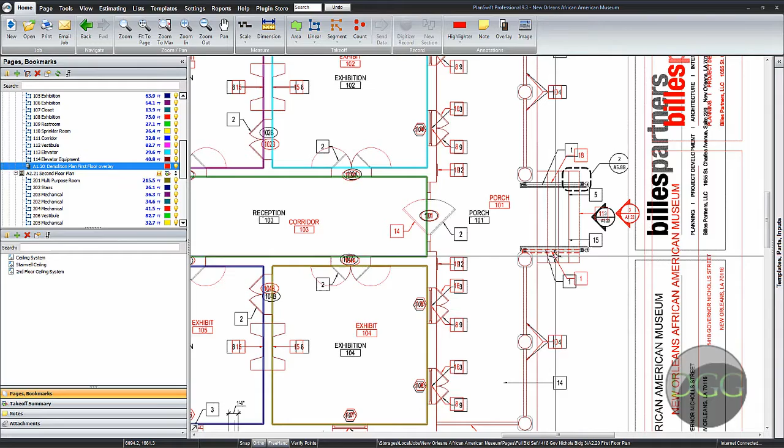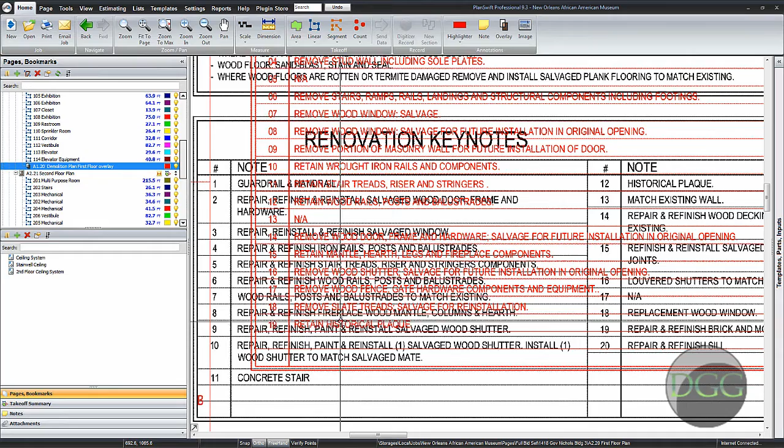If we look here, you can see they're doing some demo work in the rear of the house, and all of this work over here is being demoed. There are some demo notes along here as well - let's check these out. Looking at 1 and 18 on the demo: 1 says remove rail and components, and 18 says remove slate treads, salvage for reinstallation. So we can easily see where the demo work is taking place, which gives us a good idea that we're not missing anything in the new construction.

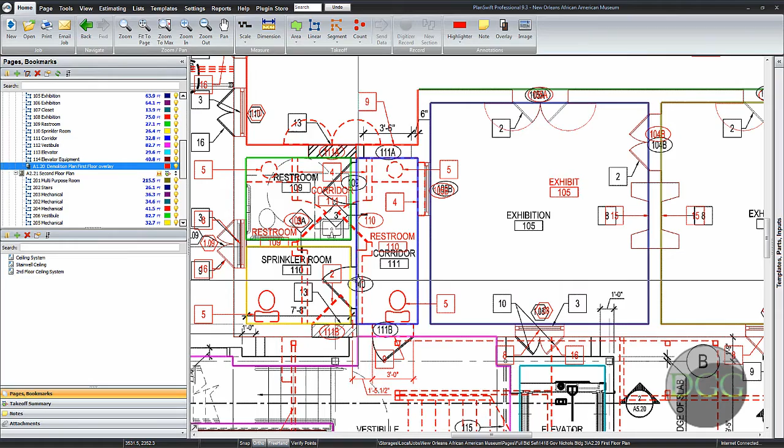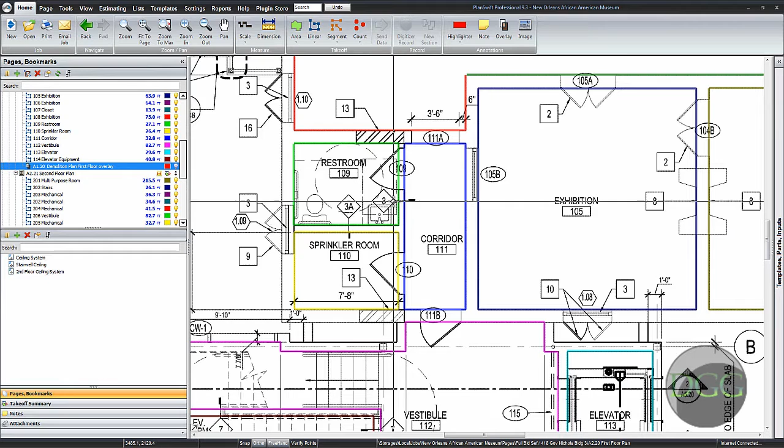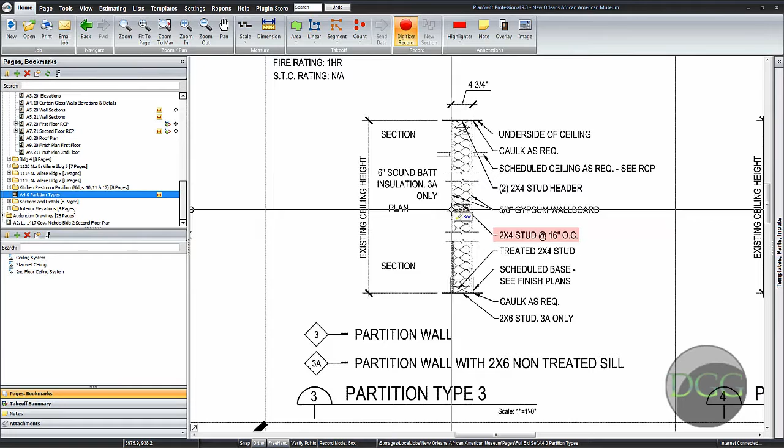In here I can see some walls being removed, and new construction taking place along here. So I want to make sure my new wall construction is being picked up in this area. I'll turn my layer off, and you can see the new wall construction right here. We'll go look for that partition type - go to the partition schedule, and it's a 2x4 stud wall, 1 layer drywall each side. So we're in good shape.

Back to the demo. As far as building 3 is concerned, you can see the demo work is pretty much confined to this entire area, the entry area of the building, and the front, along with the fact that they'll be demoing the gypboard walls, ceilings, and insulation as part of the mold remediation package. So apparently all of that will already be gone before we even begin work.

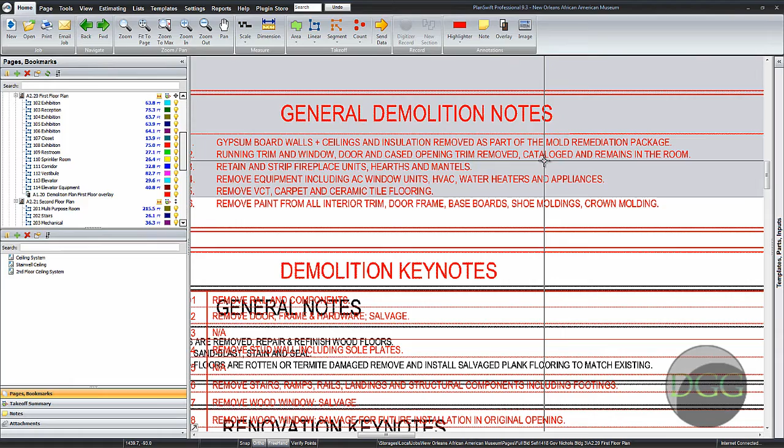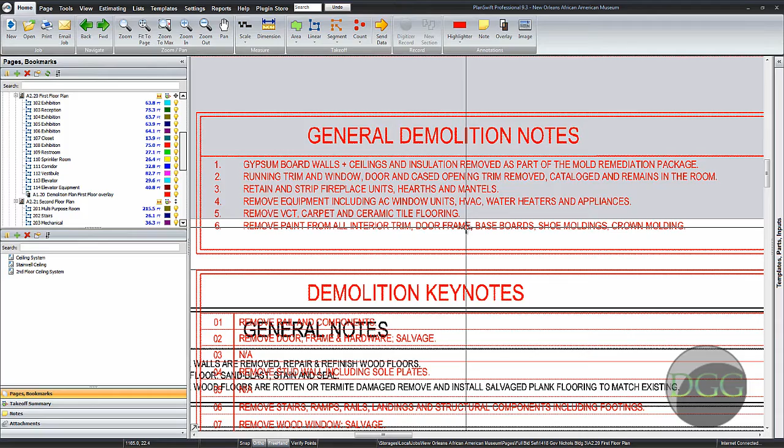Some other notes of interest: running trim, window, door, and cased opening trim removed; retain and strip fireplace units; remove equipment including AC window units, water heaters and appliances; remove VCT carpet and ceramic tile flooring; remove paint from all interior trim, door frame, baseboard, shoe molding. So pretty much we're going to have a completely demoed building down to the sticks and reconstruct. That's an overview of what's going to happen with the demo on this particular building.

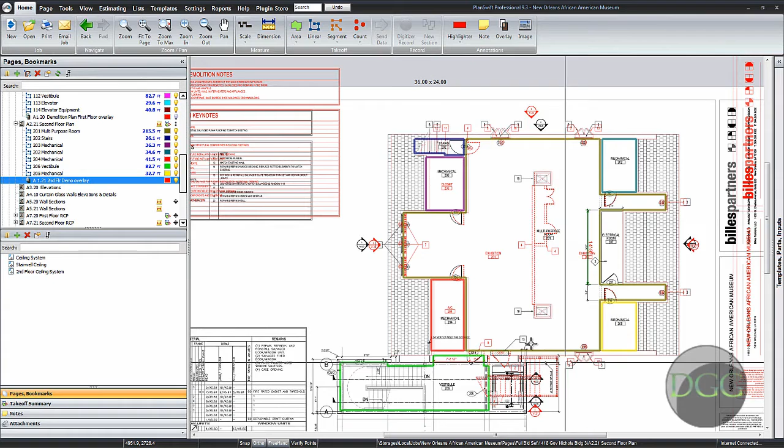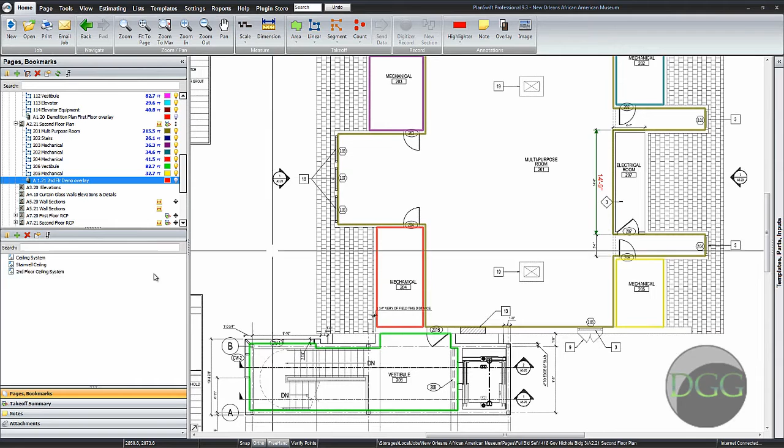We'll be moving a door from here to here, and as far as the drywall work is concerned, it's pretty much straightforward - first floor reflected ceiling plan, typical straightforward drywall work.

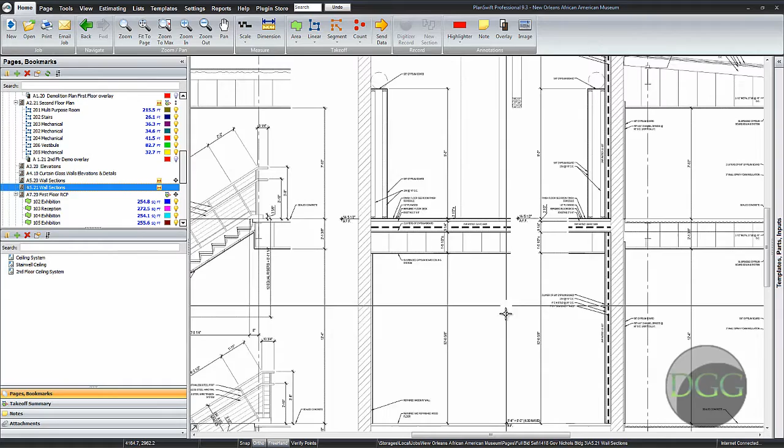Checking out the system, we'll go back and check the wall sections, and in the existing building we can see once again we're dealing with a 3-layer system: 2 layers for fire up against the joist and 1 suspended system. Typical, same thing as the last building, 3-layer ceiling system.

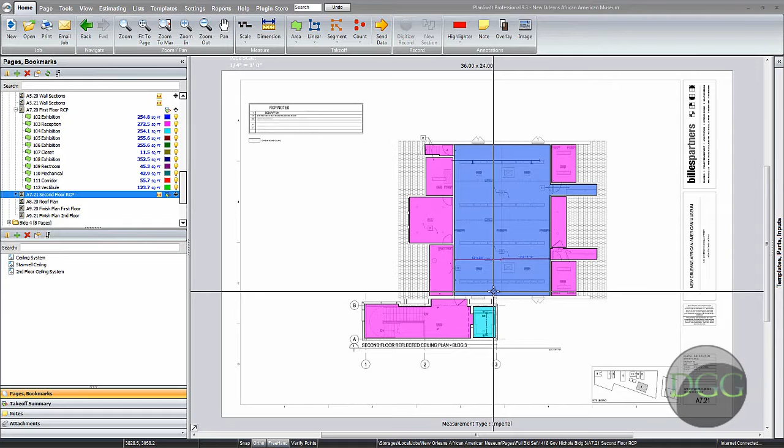Moving to the second floor reflected ceiling plan, this is a little different in that it's up in the roof area, so this drywall will be following the rake of the roof. I went to the elevations to get the pitch, and I constructed a little layout right here of where the walls are - this is going to be my layout of that room in that space.

This gives you an idea of the ceiling heights you'll be dealing with. The ceiling from floor to ceiling is going to be almost 20 feet, so it'll be high work. Oh, I made a mistake there, excuse me - we'll bring this down to the floor. You're talking about 25 feet.

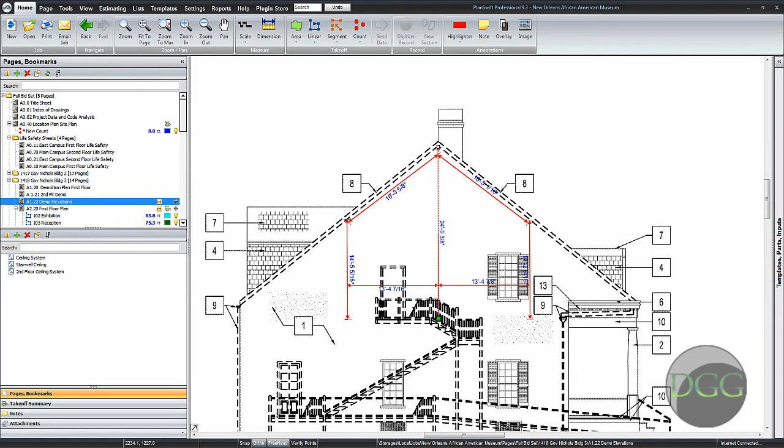Alright, with that wraps up Building 3 of the African American Museum. Up next, we'll move on to Building 4. See you in the next video.